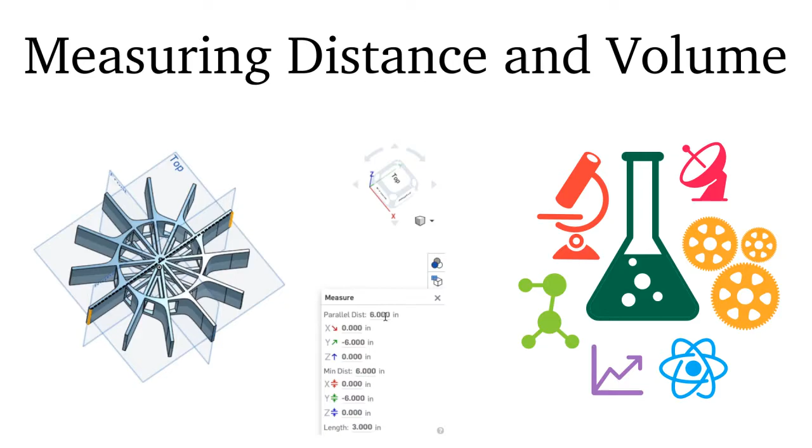Hello! In this video, we're going to take a quick look at how you measure your parts in Onshape to see how big they are and to see how much volume they take up, which is a way to roughly estimate how much 3D printer modeling material it'll take to manufacture them.

This is important because for your project on the STEM Explorer, we're going to have to impose some constraints. We're going to have to constrain how much modeling material you can use in your part so we don't go bankrupt printing everybody's parts. And we're also going to need to constrain how big your part can be, because that controls how many parts we can fit in the 3D printer at once, which controls how fast we can print parts, which controls whether or not we actually have time to print everybody's parts out. So this is all really important.

And this is another example of Onshape adding features all the time, because what I'm going to show you how to use today is stuff that Onshape has added since I started making these videos. And I'm really glad they added these features because you're going to need them.

The things we're going to use are way down here in the lower right-hand corner. We have a little measuring tape icon that says Show Measure Details. That'll be for measuring how big things are. And we have a balance here, a single beam balance that says Display Mass Properties. That'll be for measuring the volume of our part. This one's the easier one to figure out, so I'm going to show you this first.

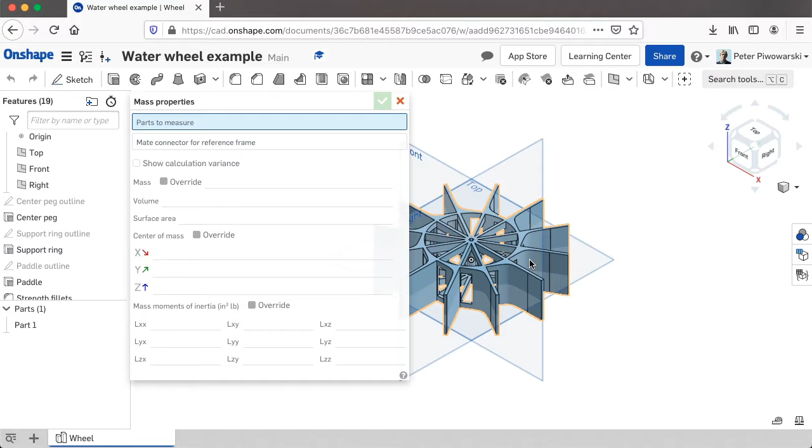I'll just click on the balance here. And it's asking me for parts to measure in this box here. I only have one of those, so I'm just going to click my part here. You might recognize this from our introduction lecture for the water wheel project as our example water wheel. I'm going to click on that.

And it says, oh no, my part doesn't have a material defined. That just means I didn't tell Onshape what I'm going to make my water wheel out of. So that means Onshape can't tell me what the mass is, how heavy it is. But what it can tell me is the only number I care about anyway. That's the volume right here.

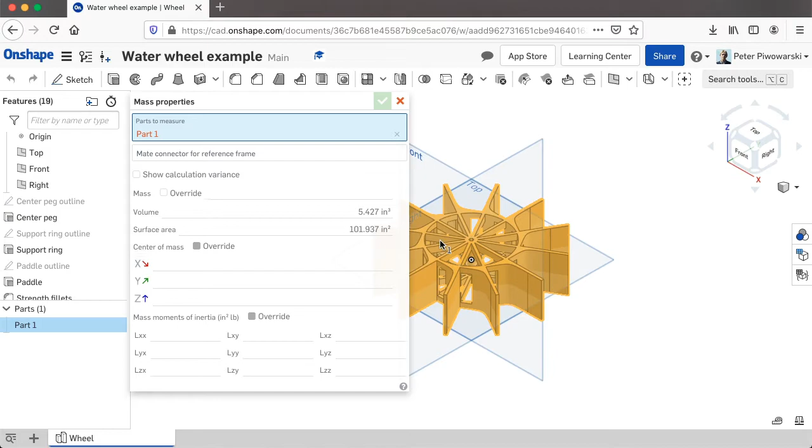That's how much water it would displace if I made this out of something completely waterproof that water can't soak into and just immersed it in a bucket of water. And that's really good. It's under 5.5 cubic inches. It's about 5.427-ish. There's probably a lot more numbers than they show in this detail rollover too. But that's fine. The constraint we're going to give you is something like 12 or 14 cubic inches for this part anyway. So we're well under that.

I'll click the red X to get out of this, and then click somewhere outside my part to deselect it. Now I'm going to show you the measuring tape so we can see how big this thing is. Show measure details. I'll just click on that. Now it wants me to select entities to measure. And there's a whole lot of things we can select as entities to measure. I'll get into that in a little bit, but for now we can just select one line. That's an entity we can measure. I'll just pick this line right here.

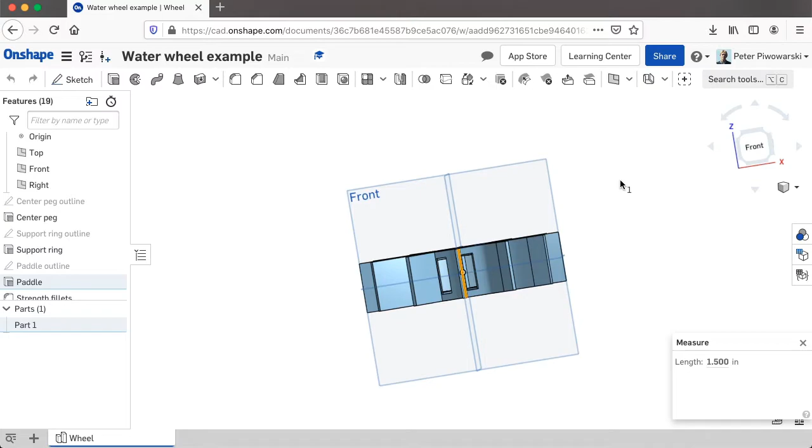And it can tell me right away that that line is 1.5 inches long exactly. And that's already real useful because if I can rotate it here, I forgot to plug my mouse in for this video, so it's a little bit hard. You see, that line also happens to say how thick my wheel is. So that's good. I know it's 1.5 inches thick, which I believe is under the constraint we're going to give you.

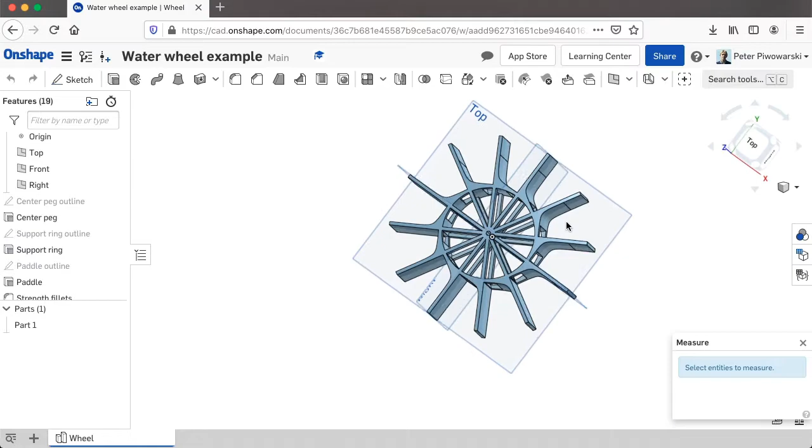And if I click somewhere to deselect that, I also want to know what the diameter of my wheel is, but unfortunately, there's a problem with that because I don't have one single line that goes all the way across, because these are all broken up by the central hub and the outer wheel here and this curved part here. That's all a mess, and I can't just measure one line to figure out how big it is.

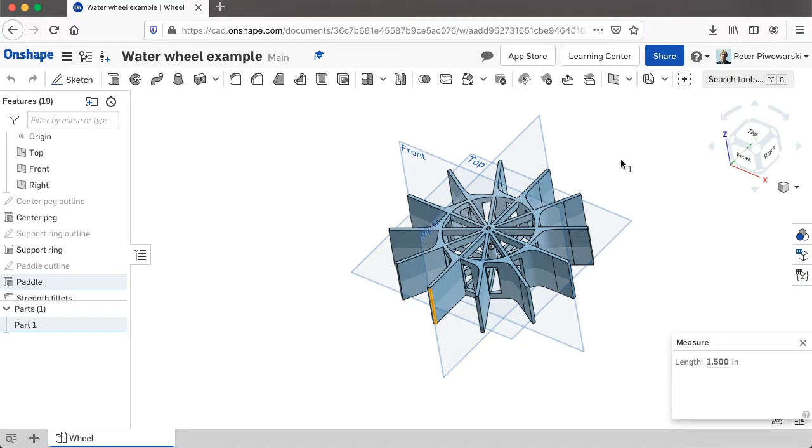But fortunately, I can measure the distance between two lines, just like when you're setting dimensions, you can set the distance between two things instead of the length of one line. I can measure the distance between two things, so I'll select that line again. Then I'll select its opposite number on the other side here. And now, perfect. I have parallel distance 6 inches.

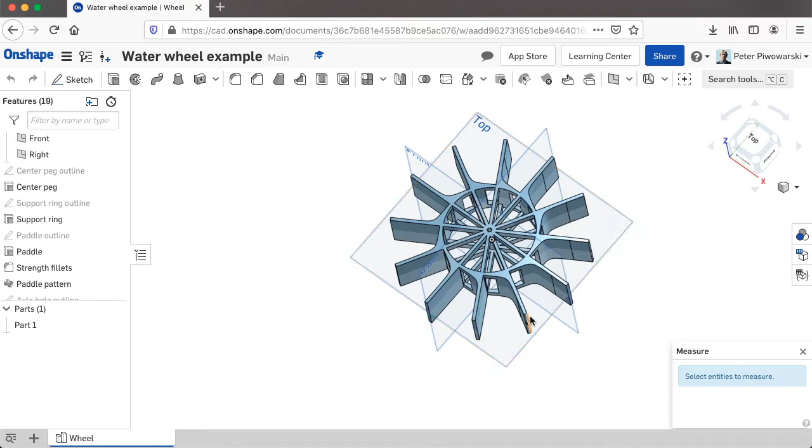And I happen to know that's exactly right because I modeled it, but I can also hover over that and it shows me that black dotted line. That's exactly the distance it's measuring. So that's perfect. And these other ones would be more important if this wasn't perfectly aligned with the right plane like it is. If I pick, say, this line, or that point there too, that'll work too. I can pick these midpoints and measure the distance between those.

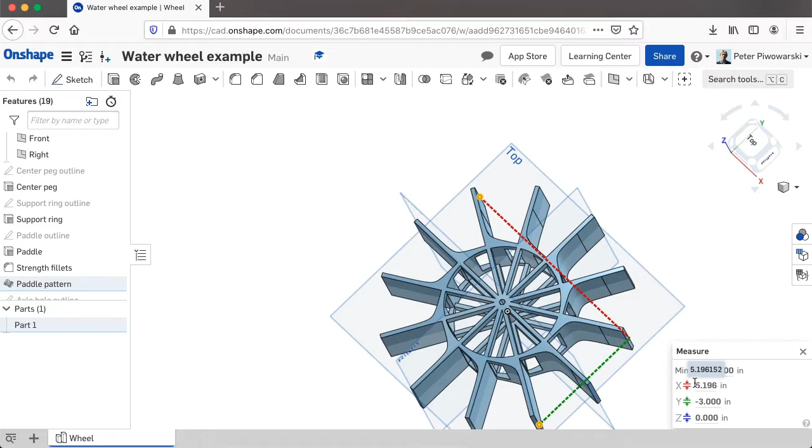Oh, now it zooms for me. Okay. That shows me I still have a minimum distance, which is the same as parallel distance of 6 inches between those points. But it also helpfully tells me that it's a little under 6 inches going straight parallel to the front plane between those two. And there's a whole 3 inches of distance between those parallel to the right plane. So that's not actually very useful to know, but I did ask Onshape to tell me that, so it told me.

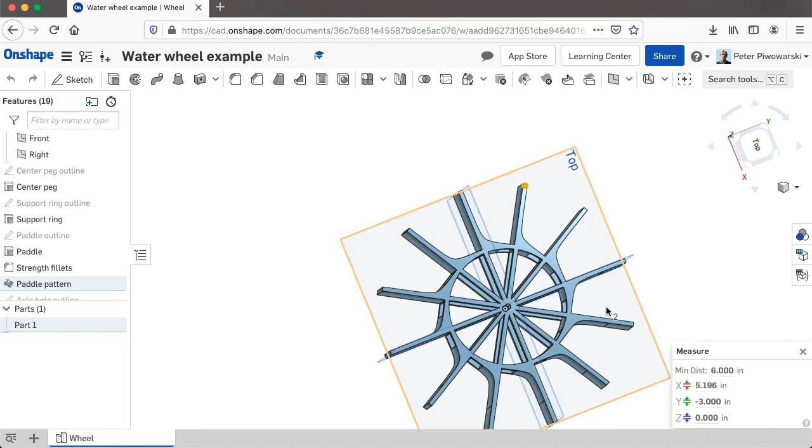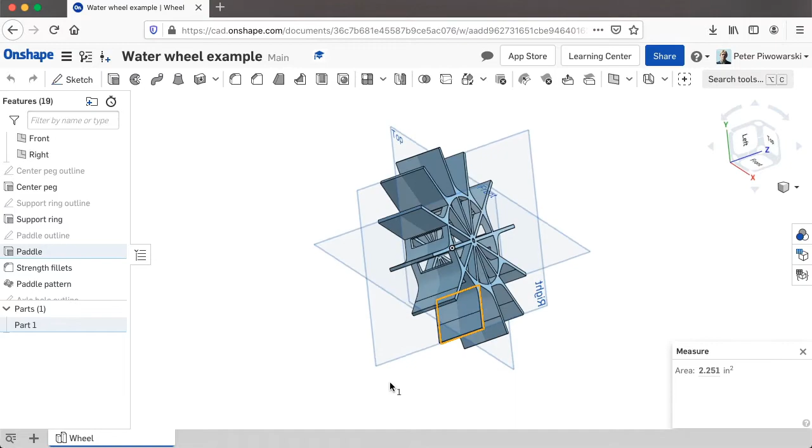So that's interesting. And we can also measure surface area of things. Like if I want to know the surface area of this paddle here, that's a little over 2 1/4 square inches. And I can find the distance between two surfaces too. If I click this one, it shows me that yes, indeed, my paddles are 1/10 of an inch thick, just like I made them. And it can tell me the surface area of a curved surface too.

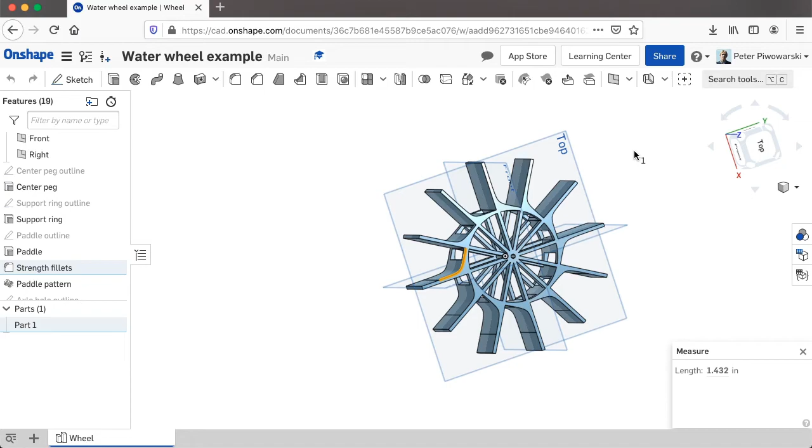This curved part with the hole in it here is a little more than 1 3/4 of a square inch. And it'll tell me the length of a curved line too, for that matter, for this edge here of the curved part. That's 1.432 inches long. And that's all it can tell me about this one because I forget if it's a parabola or some other kind of conic section, but it's a conic section, not a real circle.

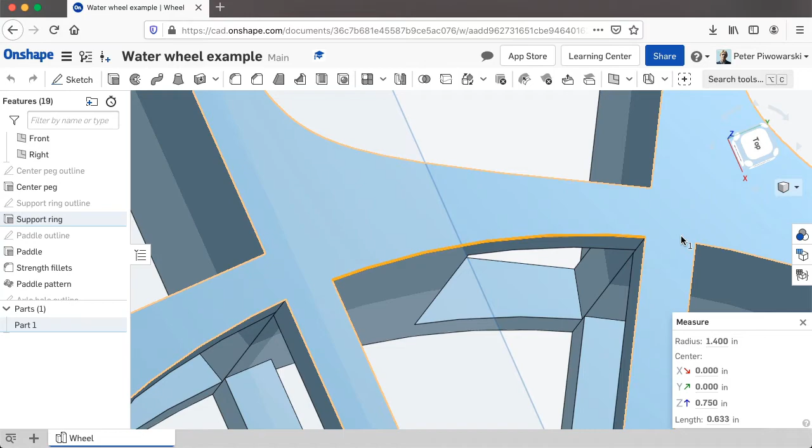But if I pick one of these little line segments in here, I'll zoom way in on this, it can tell me that is 0.633 blah blah blah inches long, but it also tells me that it has a radius of 1.4 inches. And that's really useful because I can't select this whole circle again because it's all divided up into little individual circle pieces. So that's actually really handy. I can find out what the radius or diameter of that circle is. 1.4 would be 2.8 inches of diameter.

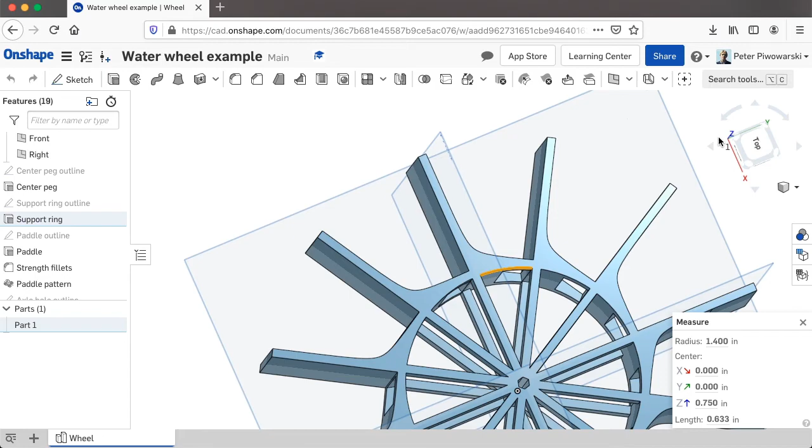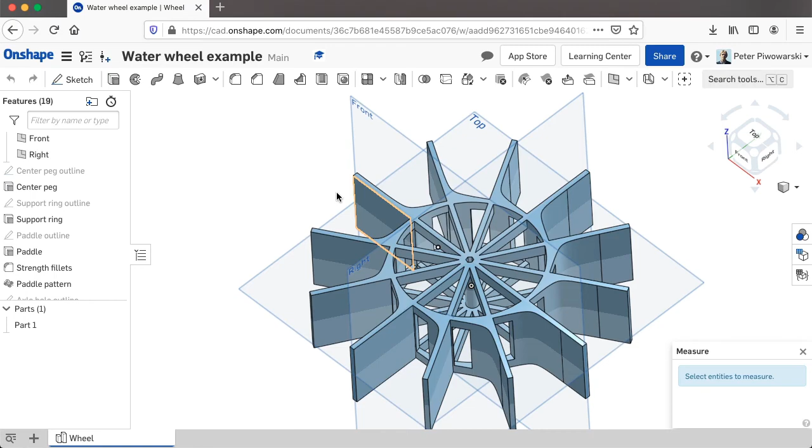And I can also find out useless things like this whole surface area here is almost 5 square inches. I'm not sure why you'd want to know that, but maybe you might want to know that, and you can find it out if you do. There's all sorts of weird things you can measure with this if you want. So I hope all that helps you keep your part within the proper constraints.